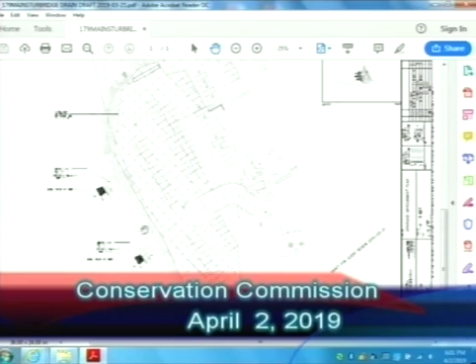The things I think we need to think about is, this is where our 100-foot buffer zone is here, 200's here. I think their plan is to have you guys say okay and put these in. So I think we need to talk about that and what permitting strategy would be best for this.

Okay, so that's over the side and down, huh? Yes, yep. And both of them are on his property? Correct, yep. And where they're kind of located, no large trees would come out.

I don't know if any, obviously there's trees in this area, so I don't know how much disturbance is associated with it or a limit of work. Is this his lot line or something? Yes, that should be the property line.

Because he intimated when we were there that the lot line was the edge of the parking. That's what I was wondering about. But there's something here, but I don't know what that is.

Did he talk about that pipe that comes out at the bottom of the slope? He did, when I spoke to Frank about that originally I mentioned that pipe, and he emailed me after that, he looked at the plans, because I said I don't know where that catch basin up there comes out, and he said he would look at that and they would work to address that too.

I don't know if that's coming out, there's a catch basin up here, but I did not ask him about that today, if this incorporated that. He did say he was going to look, it doesn't address it. That's a lot of water, and that somehow has to be factored in addition to the runoff from the parking lot itself. There was a very significant flow coming out of there the day I was there.

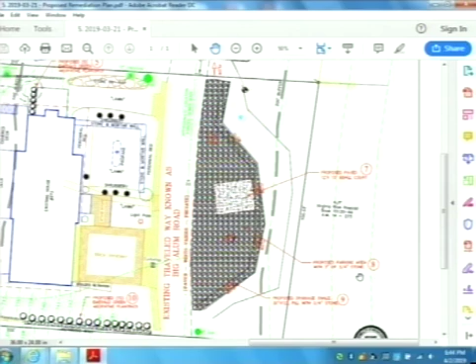The parking area is the same size as what it is now, we're not changing the size of it at all. The original plan did have it wider, the one that Glenn Colburn had reviewed prior to you buying. We're looking to just keep it that size, make sure we have sufficient depth of aggregate to infiltrate in this channel, 30 by 12, to infiltrate additionally during the summer, and then the flow. Also making sure that these arrows are aiming in, so there's no backup of water onto the road, which was a Glenn Colburn issue with the icing on the road.

And it goes down to the catch basin number 6. Yes, and we'll suck that out, as it's filled with sand at this point. Right, I think we saw that.

Okay, what are you on, number 9? 8, 9, so we ended up hitting 10. Yes, we hit 9, and we're at 10.

Mr. Howard, those are still sitting on the side? Those are not there yet, no, we waited on those. It's the same as the other ones on the other side, if I could ask for the chairman. Yep. Same size.

15 of them. Move - 15, not 14? Am I reading it right? Proposed 15 emerald green. Where's the... it says 15? 14 on mine. It says 15 on the plan and 14 on this extra sheet. We'll go 15, it's 15, doesn't matter, we'll correct that. We just have to tell - no, we'll just write it in, we don't want any more paper. It is definitely 15, we don't want to request a new plan. 4, 6, 8, 10, 12, 14, 15. Well, we're on number 11, we gotta keep moving here. I know, I just want to make sure we had the right number. Yeah, it actually symbolizes 15, so 11, 12.

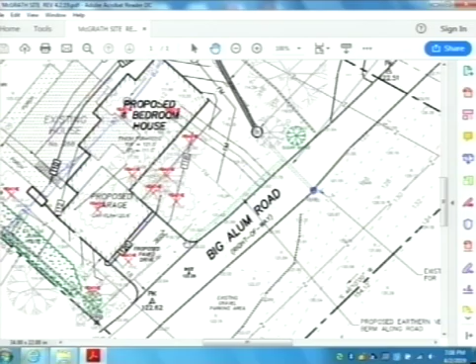So those were the three things from the last meeting, one being the well, which wasn't a requirement. And that's a really tiny driveway, so. Exactly, yep. So those were the only things, and based off that, I didn't think that they needed to have him come here and represent him.

All right, do you want to open it for questions from the audience? I can open it. Want me to start with you? Questions? I don't have any questions. I think that they added the two things on the plan that we were looking for. It would have been better if they could move the well because of the disturbance to get down there to put it in, but.

Anything from the board members before I go to the audience? Nope. Anybody in the audience like to speak on this? Jenny?

Ginny Rossioli, an abutter in the back on the hillside. I just want to be sure that you add in the order of conditions that if there is to be any digging on the hillside, that you relook at the drainage and any issues. I think that's something Rebecca wrote down in the first meeting. You mean on this backside here? Correct, the permit, any change of plan, anything within our buffer zone that's not on this approved plan, they need to come back to us. Okay, so we always have those general conditions.

We talked about the 22, 24-foot difference in elevation from the right-of-way down to the lake. There's no retaining walls that I'm aware of, is that correct? Correct, it's just the grading behind the house and some grading shown on the side here. And can I just say something? There's no work that's planned here, right? This is all existing, so yeah.

Now, will they be asked to do an as-built? Yes. Good, okay, I would hope so, because I think that just clarifies and keeps things consistent and will keep everybody on the same page. Right, great, okay, thank you. Welcome, thank you. I don't have anything.

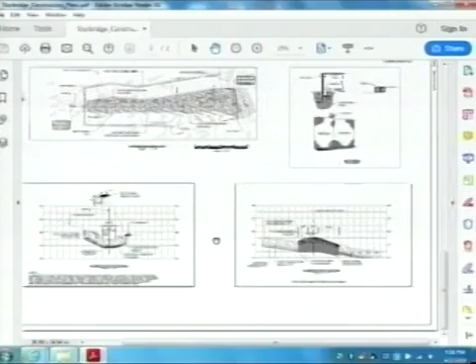So Bill, I looked at it quickly and I just didn't know - sometimes you see it more like over on Route 20 here where they're doing it. Well, that one's vegetated, but it's got more of a pooling area. I mean, would it be useful that it's kind of lower here? It doesn't look like it would hold back and slow down the water too much where the stone's right up to there. Well, I think you're probably talking about the freeboard of it, above the top of the stone.

I think the intent of that is kind of dual purpose. You get a little bit of settling, but also because of the construction of that check dam, you get some infiltration as well. So I guess it accomplishes a couple of things: infiltration as well as a little collection of sediment.

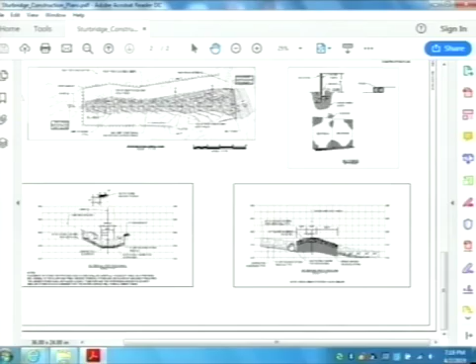Do you want me to zoom into these? Anybody want to see one up close and personal? Yeah, actually do you mind zooming in on that just a little bit? Just want to see. Okay, that's graded crushed stone. All right.

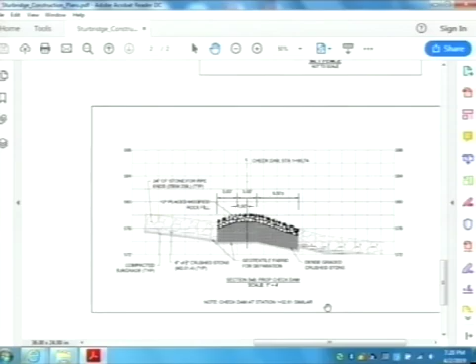Steve? I'm good. Yeah, I'm good too. Paul? Yeah, it's fine. Becky? All set? Yeah, that was my only comment, so I just didn't know if that's gonna help really slow down the water there. I think that's a good enough comment.

Yeah, I think that's a good comment, especially because, I mean, over 1,200 feet of swale, especially given the slope, to have that serve as an actual check dam.

Well, there's a lot of them, but I don't think I have a problem with it being a little bit deeper on the upstream side. And there's actually three checks there - one here, and one down here, and one here.

I also wanted to point out that I asked our consultant to include the limits of the tree clearing. I had a conversation with our contractor - if you'll see, the squiggly line there indicates the approximate limit of clearing of the trees. A lot of the trees' root systems are underneath the existing concrete swale, which probably has contributed to the concrete swale failing. Yeah, that's a good point.

Not surprised. Bill, do you guys have an idea when you might be able to implement this plan? I do not. It looks like it would be appropriate - if we look at the end of the swale, the existing... I don't know if you can go back to sheet 1. The existing deteriorated concrete swale is partially underwater, so it does seem it would be appropriate that we probably would want to do this work during the next drawdown.

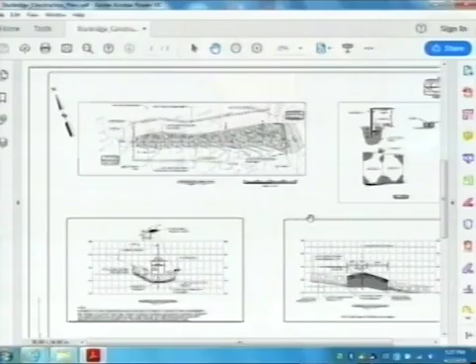Okay, I have a different view of it now, I like that. And with getting the numbers from BSC, I think that'd be useful to know that this will function correctly, so it'd be nice to see that.

So am I hearing that this is a next drawdown project? If we wait until next drawdown, we can pretty much guarantee there's gonna be another pile of sediment there by next year. I'm thinking we could go back in and remove that material at that time. Seems appropriate. So can we be assured that we're going to have this as a project as soon as the drawdown arrives?

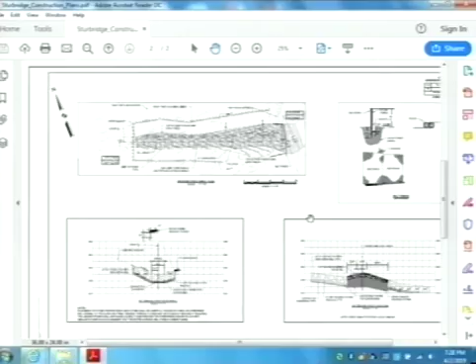There's always an issue of funding. I know, I've already put in that request. We have a singular drainage contract right now in the district, and we're trying to get additional resources if possible. So I guess, as in anything, it's a matter of funding, but I have put in that request.

Maybe the fact it's an enforcement order might help them decide. Yeah. What else? What would help to assure our funding?

Well, I know I've had this discussion with the district highway director, so he understands it's important to the Lake Association and the Conservation Commission. So I have had that discussion with him.

I'm going to be with our local rep Friday night. Should I talk to her about it? That's fine. Does that work? That works, would be helpful to have that conversation.

Steve, you're going to be there, right? I'm not sure. If I am, I'll raise this issue. I've got my kids wanting to come over, so I'll see - Ann, my kids, my granddaughter.

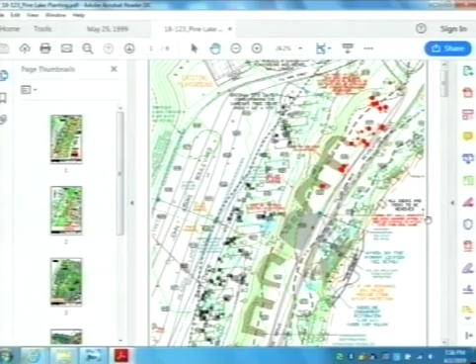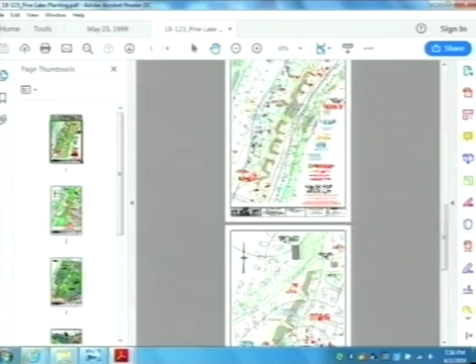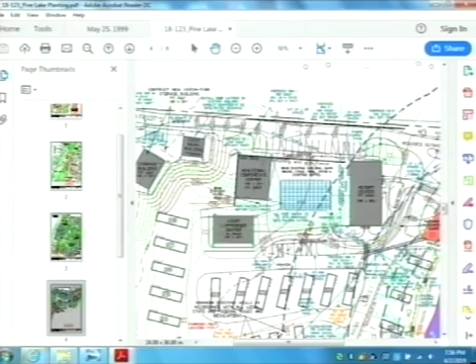Do you want to zoom in on it? Yep, I'm just trying to get my location shown. Where did my notes... there we go. Which one, sorry? It's up near the entrance, the Village Circle riverfront. Do you know what sheet it is offhand? Might be 4. Yep, right there. Scary that I know these plans. Good to have people with young eyes to see that. Help us old people out.

Yep, that's so the area in here was the original planting area for the riverfront area, so we've got 40 shrubs in there. If you remember, it's quite a dense stand of white pines through there, so we tried to plant shrubs that would do well in those shady conditions, adjacent to the river. And again, that hasn't changed from the original approval plan.

And then moving on, we've looked at the duck pond areas. So we've got duck pond area B, this area here. We actually expanded this area from the original proposal, increased the number of saplings. So we've got 15 saplings, 25 shrubs. And at Becky's request, we increased the size of the saplings in through here, so we've got 2-inch DBH. The intent was to kind of mix up some of the larger stuff with the smaller stuff, where you've got areas that are relatively open here.

There are other areas where we really couldn't do the larger plantings simply because they're an understory planting, which causes two issues. One, you've got existing root systems in those forested areas, so the larger the tree, the larger area you have to excavate to plant those, and you end up disrupting the roots of the existing trees and causing additional damage. Combined with the second issue, a lot of the larger trees, 1 inch or greater diameter, are all field-grown trees.

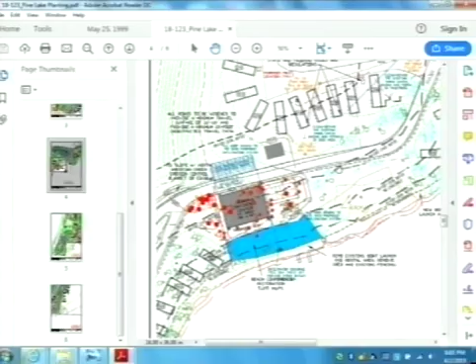Finally, the last area is down near the conference center. There are some existing trees in through here, so we're proposing just some understory shrub plantings to mitigate for those other areas.

So we've gone through all of that, and I also added some additional details at the end. A couple things Becky asked for: that the plantings be distributed throughout the areas to make them appear natural, not planted in rows, which was important to her. Also, if nursery stock isn't available, we can substitute the species with similar native plants. I gave a broad range of plants, so we should easily be able to get those.

And then we'll monitor these to make sure that they're doing well for a couple of years. Lastly, we're planning on providing a copy to all the excavation contractors to make sure that they're aware of the order conditions and these mitigation plans.

So we planted robust and substantial plants. We're exceeding 400 and some odd plantings through these areas with about 150 saplings. They've talked with New England Wetland Plants, and New England Wetland Plants has all the plant material they're looking for.

So at this point, we'd ask that the commission, if you're satisfied with these plans, we can make some minor modifications, but they're looking to get some of these plantings in now, since it's kind of the prime time. So if we can get the commission's blessing and move forward with these things, that's the plan - to do the plantings as soon as we can and continue with the project.

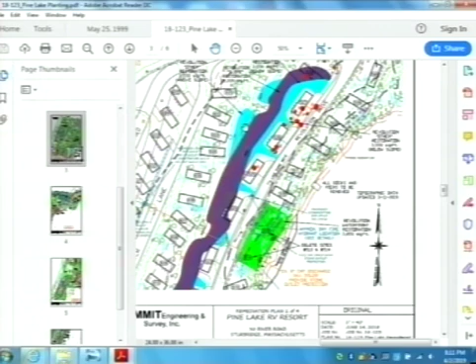So you're saying this is not inclusive, this is in addition to this plan that you handed me? Is this inclusive of the planting you're going to do? Yes, so we've broken up all the different areas and provided planting. But I'm just saying, you were saying that was different planting. I thought you were saying there was other planting being done. It's a different called-out area on this, as opposed to - okay, misinterpreted, okay.

Did you guys look at one of the comments I had - can you increase the berm size in some areas? I don't know if that's possible, but has anyone looked at that, or is there a reason why you can't do that?

It's tight because, keep in mind, there's trailers to be able to get in and out. The last thing we want to do is plant a tree right here and one on the other side, then come back and say we have to cut trees down to move this trailer. I thought they could lift them out, though, no? No, it's not quite that easy. Well, I think they did that when they removed a whole bunch of these.

Part of the problem is the original plan had the trailers going the other direction, which would have been easier to access from the road, versus now having them sideways so they have a nice view of the lake. That makes it trickier to get them in and out of those spaces. That's basically my interpretation.